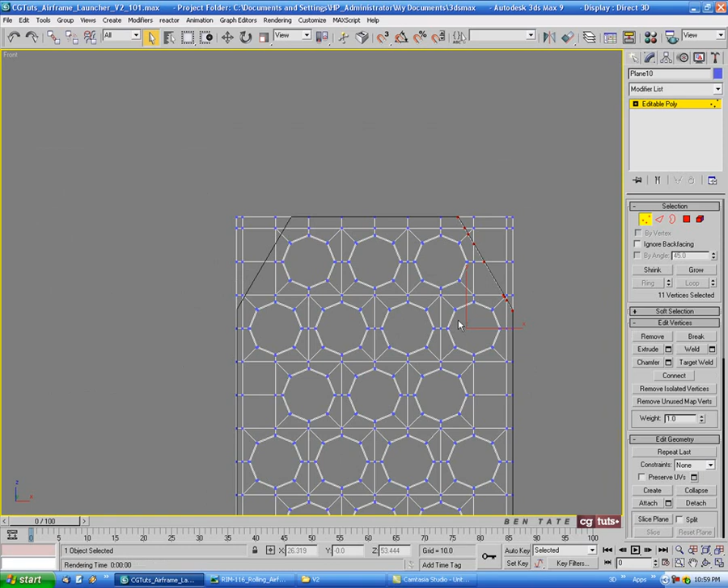Let's go into vertex and select all the verts on this half of the center, everything from the center line over to the left, and delete that. Then we'll come up to the top and select any verts on the outside of our spline line, just grab those, and delete that.

We have a couple triangles here and a couple of n-gons. Let's go to target weld, and weld this vert to this one, and this one up to that one, just so we have a quad here and here.

We have a triangle here, and I don't really want to spend too much time reworking the topology, so let's just get it into quads quick. Let's get out of target weld and go down to cut. I think we'll cut from this edge here, the center of this edge, straight across to the outside edge.

Let's cut maybe from this vert here, and go right up to the top edge, just like that, and right click to end. Then we'll turn cut off and go into edge. Let's select this one here, and control backspace that one over there.

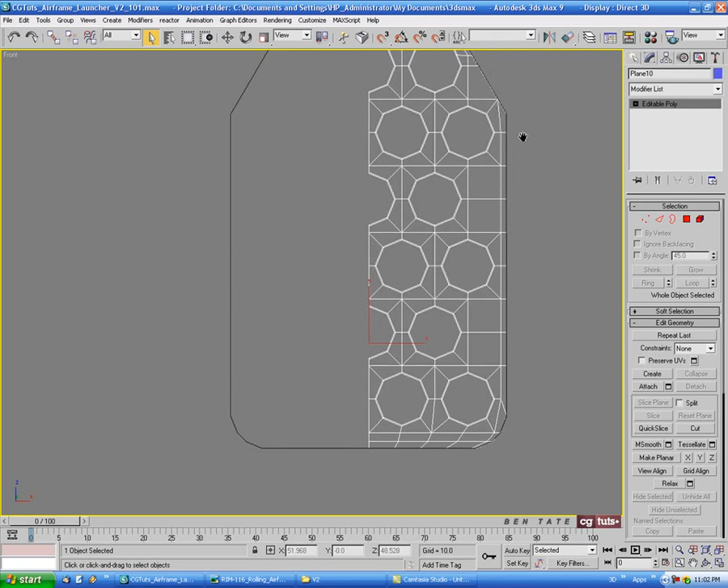Now let's do a mirror, and we'll do a copy on the X, then go over to attach, and attach these two together. Let's also select our spline, hit H and select shape 01. We can delete that now.

Let's go into border and select all the borders, or the circle borders. Actually, wait, I forgot to do a weld there. So let's go into vertex, do Control A, and we just want to weld the center seam. We'll open up weld again, do that the same amount, and OK.

Then we'll go into border and select all the borders for the circles, so everything but the outside edge. Then we'll go to the move tool, hold shift and drag this back on the Y, just to get these some thickness. It doesn't really matter how far you go back, because we'll have some plugs in there anyways, so you won't really see it. Just pull them back a bit, and we'll go into the left view.

Let's just drag right down the center of these edges here. Whoops, actually I'm still on border, let's go to edge, so we have all the edges on the insides of the circle selected.

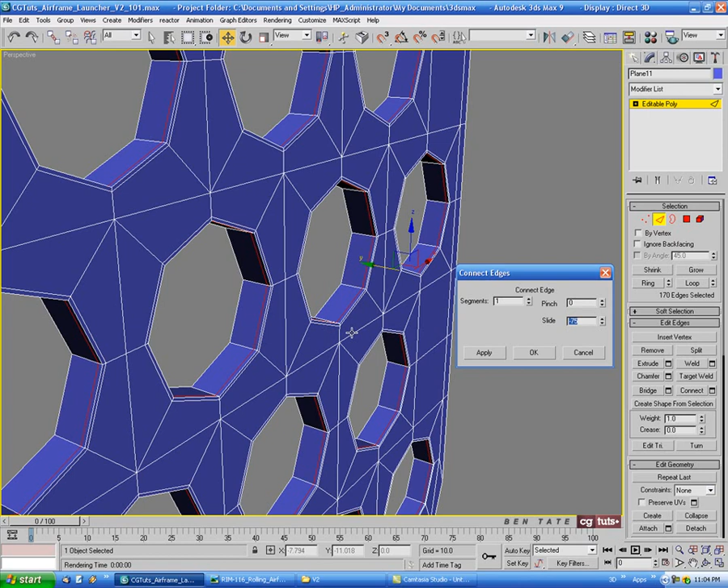Then let's go back into border and select the border around the whole thing. In the left view here, I'm just going to shift drag that back a bit. We don't need this piece to be very thick, you can see it's pretty thin here.

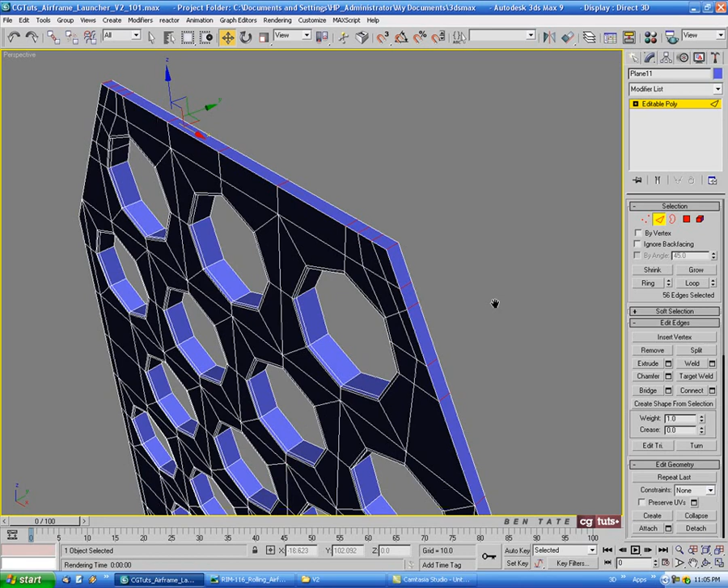Okay, just something like that. Now let's go back into edge, select the corner edge here and do a ring. And then we'll control click polygon.

In the front view, let's do an extrude, and we'll do that local normal, and bring this way down, way down. Okay, let's zoom in here. Let's do that tiny, like 0.3 maybe.

This will just give us a support edge running around the whole face, rather than trying to cut that in by hand. It will make the cap a little bit bigger than the barrel, but that really won't be that noticeable. So we'll just do 0.3 local normal and OK.

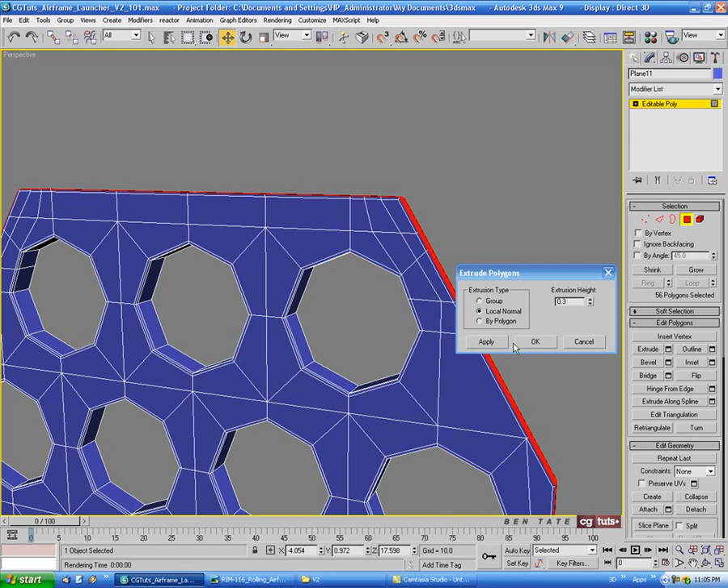And then we'll go back into edge, and those should still be selected for you - the ring around the outside. So we'll just do a connect on that, and let's do 2 segments, no slide, and we'll just pinch those out a bit.

Okay, and we'll do about 80 or so on the pinch for that. And OK. And let's see.

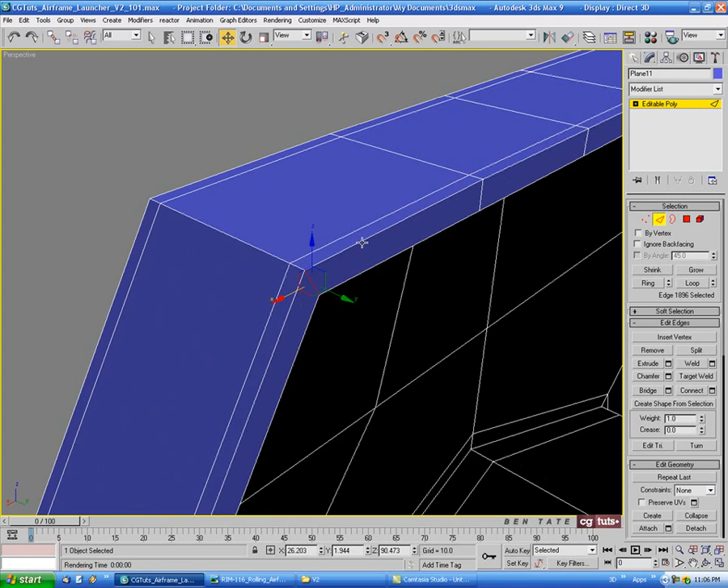Let's select this corner edge on the back, right, just that tiny one there. And just to be on the safe side, I'm going to do a ring and a connect, and I'm just going to do 1 segment with no pinch or slide, so it's right in the middle. Alright, just to sharpen this up a little bit more. And OK.

And let's get out of edge, and we'll put a TurboSmooth on and see if we have any artifacting. Alright, so TurboSmooth 2 iterations and isoline display. Okay.

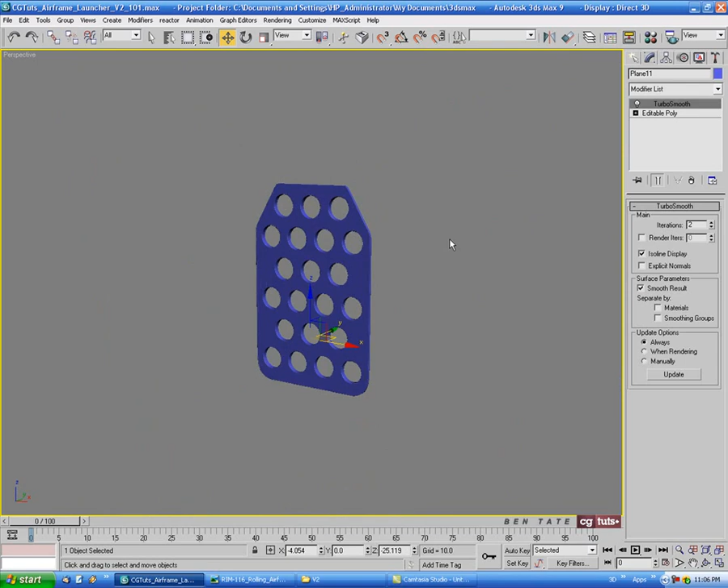And that looks pretty decent. I don't want to take too much time on this piece. So let's unhide all, and we'll also go into the hierarchy tab and center the pivot point.

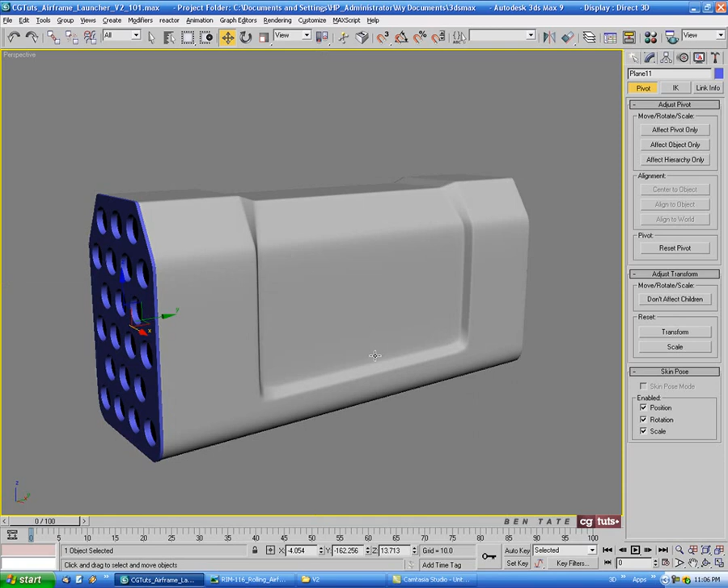And in the left view here, let's just move this to the front, and we'll just line it up. Okay, right there, just so it's sitting up against the front of the barrel. Alright, you can see it's a little bit higher and wider, but that's okay. We'll just leave that.

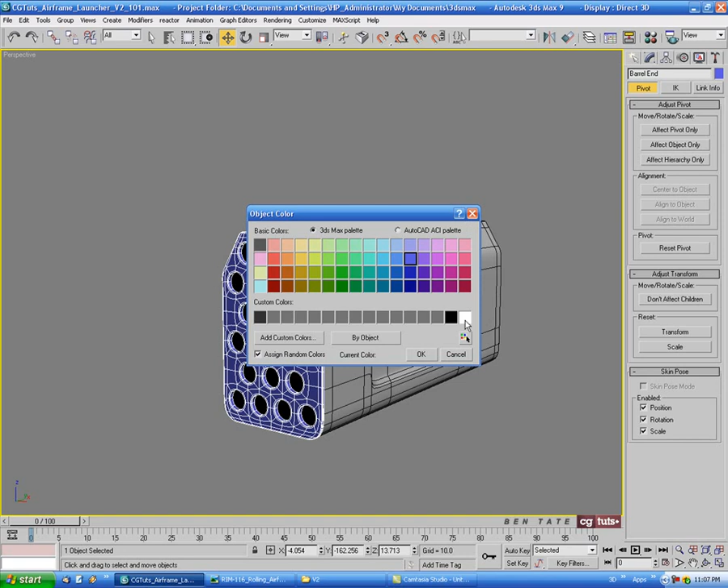Okay, so let's name this, and we'll just call this something like barrel end or something. And we'll change the color and put the gray shader on there. Just like that.

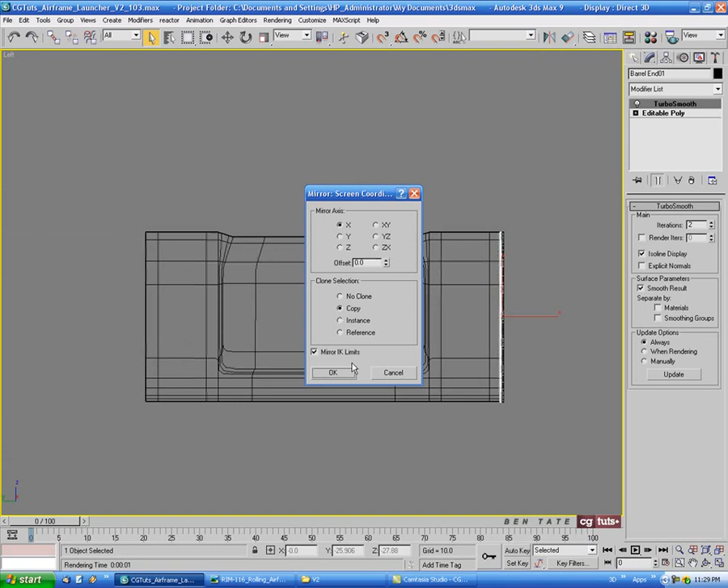Okay, so let's just select the front here, and in the left view, let's just do a mirror. We'll do a copy on the X again, and OK. And let's just move this one down to the other end. Okay, we'll line it up the same way, right, just against the end there.

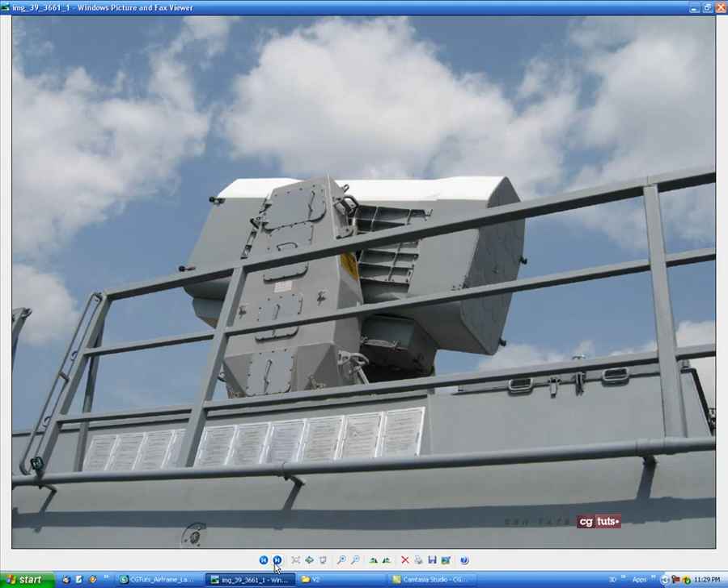And if you're concerned about the poly count, you really don't need to have these holes on this end. If you look at the reference here, you can see that the back of this doesn't really have plugs. It has just some little cylinder doors or caps over top of the holes, so you really can't even see the holes in there.

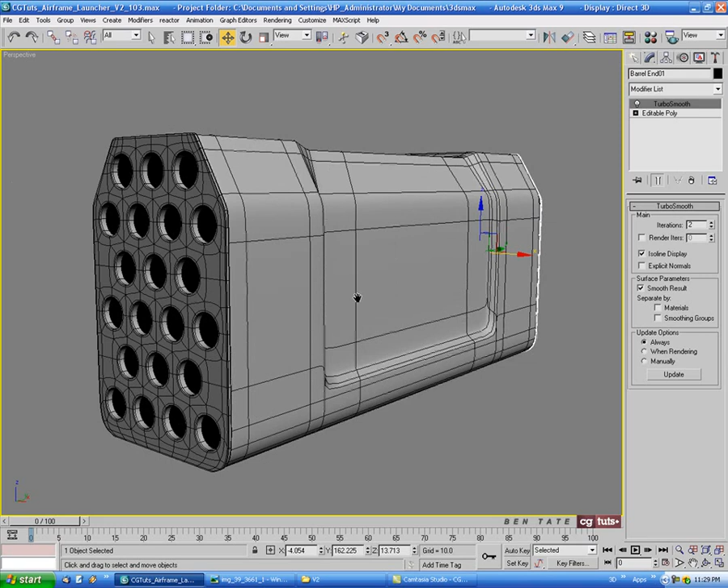So if you're really concerned about the poly count, you could actually just do this back plate flat. But for the sake of the tutorial and speed, I'm just going to do a straight copy of this one. So let's find a front picture here.

The next thing we'll do is the caps in the ends, and these are pretty simple. Doesn't really have a lot of detail, just a small punch in. Okay, so let's go into the front view here, and let's zoom in on the top holes here.

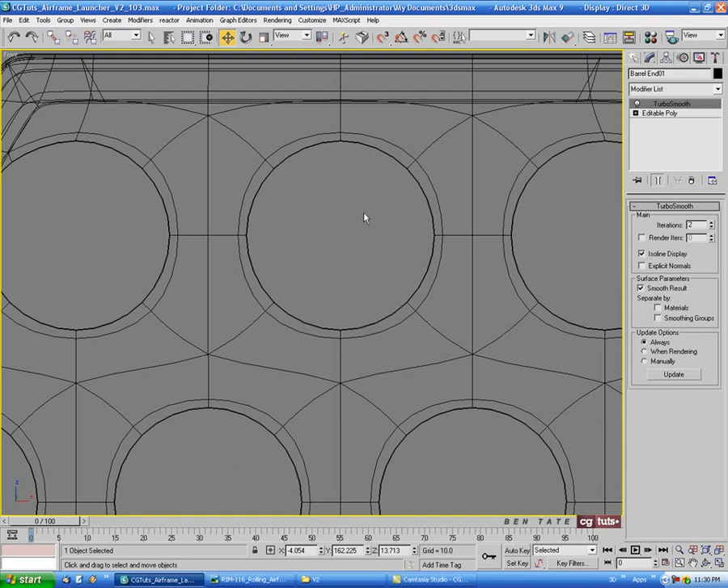Let's just go into the create panel and we'll grab a cylinder. Let's just draw that out, and we'll try to get it close to the size of the hole. Give it a little bit of height, and let's do maybe 8.4 or so for the radius, and try to center it.

Okay, and we're not going to TurboSmooth the caps, that's really unnecessary. So let's just take the sides up, and we'll do maybe about 60, and that's a lot, but it'll give us a smooth result, and this will really depend on how close you're rendering to this. So I'm going to do 60, but you can do less if you want, and we'll also do 2 cap segments.

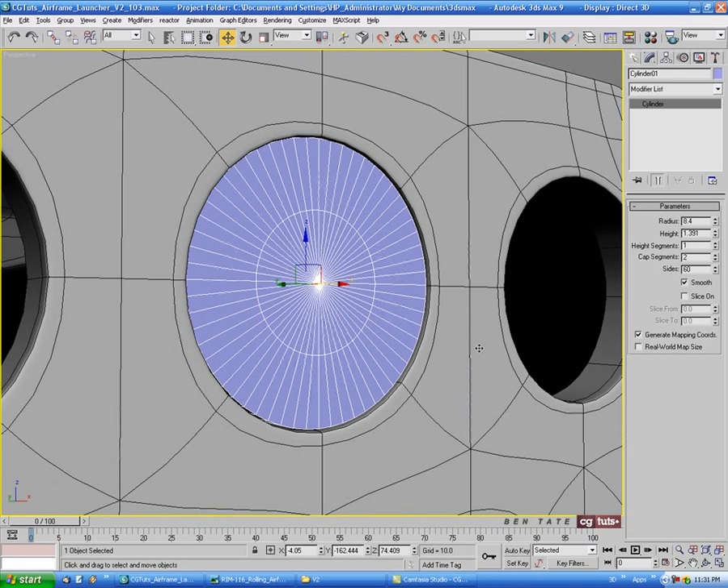Okay, so let's jump into the left view again, and we'll just move this on the X towards the front, and we'll just put it in the hole there. And you can just hit Z on the keyboard anytime and it'll zoom to your selected piece. Okay, so let's see.

Let's right click and we'll convert this to editable poly. Let's go into polygon, and in left view here, let's just select all the polys, and then we'll hold Alt and deselect the front and side ones. Okay, so we just have the back cap selected, and then we'll just hit delete, we don't really need to have those polys in there.

Okay, so let's go into the front view, and we'll go into edge. Let's just select an edge on this ring here, and loop that, and we'll just scale this up, right, let's do something like that maybe.

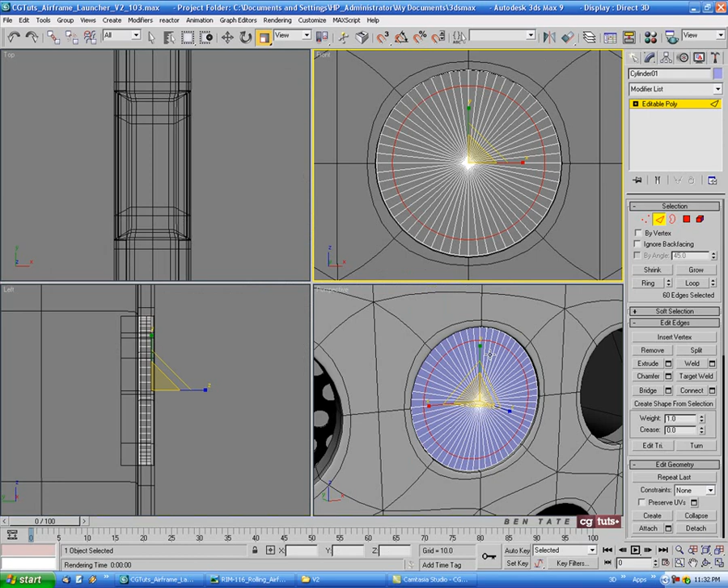Let's go into polygon and select the center polygons, and we'll punch this in with extrude. We'll do a -1, maybe -1.5 on that, and OK.

Let's go back into edge, select the inner edge here, do a loop and chamfer, and take that down. Let's do about 0.15 or so on that one.

Then we'll select the outer two here, loop those and chamfer. We'll take this up a little bit, maybe 0.2, hit apply, and roll it over a little more. Maybe 0.08 on the second one, and OK.

Then we'll get out of edge and put a smooth modifier on this. We'll just do auto smooth, and it'll help with some of the faceting when it renders. Let's call this barrel cap 01, then change the color to black and put the gray shader on there.

You can see it has a little bit of a pin piece here, kind of like a bolt or something on there, so we'll just do a simple one of those.

Let's go into the front view again, go into the create panel, switch this to extended primitives, and grab an oil tank, and drag that out in the center here. Something like that, give it a little bit of height and a little bit of a rollover.

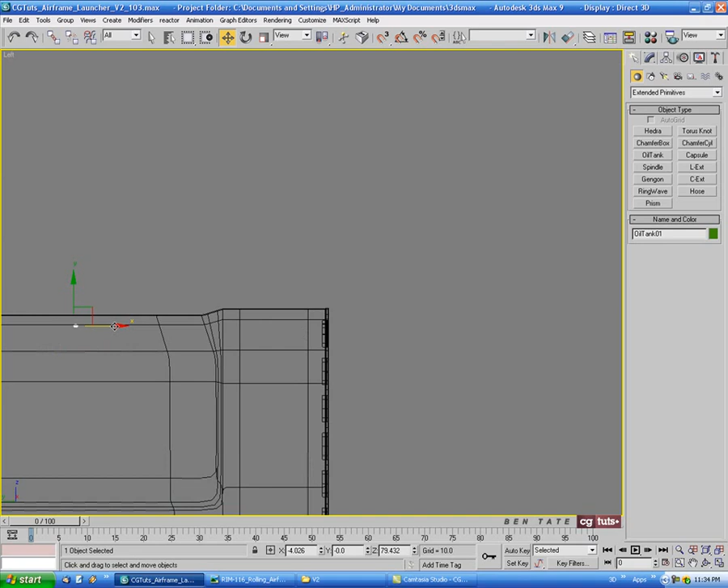We'll move this to the front as well, pull it out here, and let's push it back a bit.

Let's do maybe 0.8 or so for the radius, and leave the height at say 2.5. For the cap height, let's do maybe about 0.35 on that.

Before we convert it, let's add a couple more sides to it. Let's do 20, just so it's a little bit smoother, and then we'll right click and convert this to editable poly.

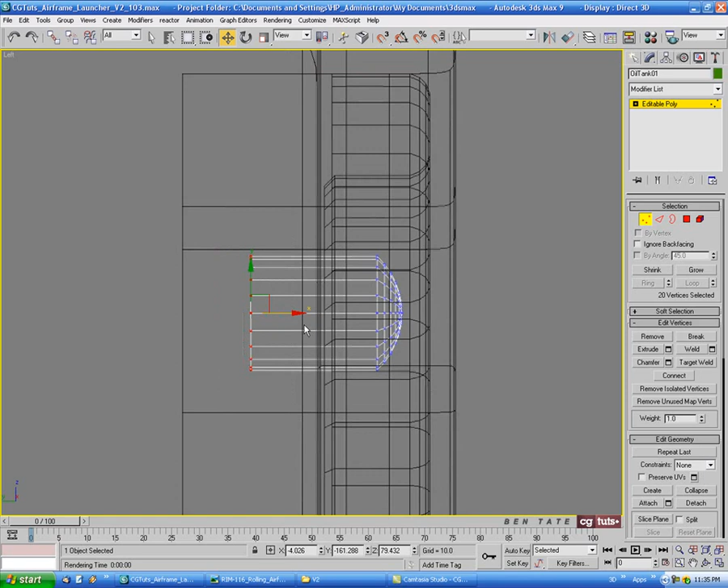We'll go into vertex, grab the verts on the back cap, delete those, then grab this row here and move it forward a bit. Just like that. Let's also chamfer this edge down here.

So let's loop that and chamfer, and let's do a really small one. Let's do about 0.02 and OK.

I'm just going to select the cap here and copy its name, then select our little bolt here and paste that in there, and call it barrel cap bolt 01.

I'm just going to change the color of that. So we'll select that and our cap, and in the front view here, let's make sure everything's aligned. Smooth that down a slight bit.

We'll hold shift and copy it over to the other holes, do a copy there, and try to get that one lined up.

It looks like we have a little bit of a problem here with the mesh, with the hole, but we'll fix that in a minute. Let's just do our copies first.

So let's shift drag this one over here, and we'll line that up, just like that maybe.

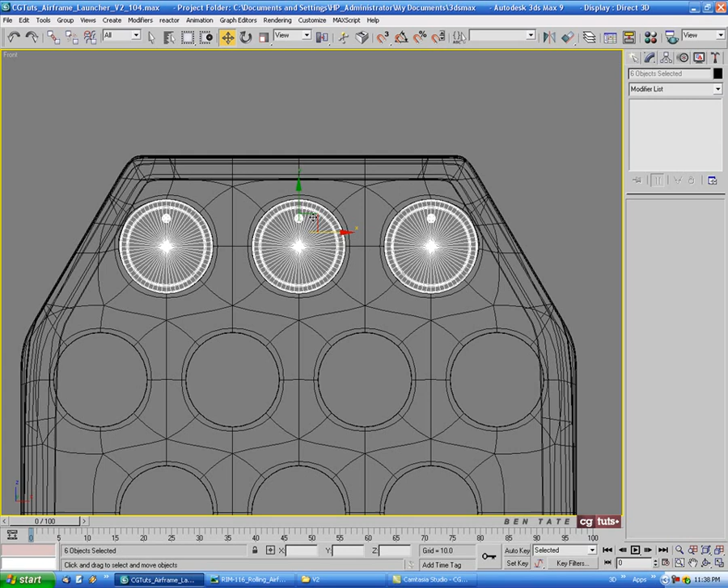We'll hit H, and select all three of our caps and all three of our cap bolts. Then we'll shift drag these down and do a copy, and just move those over and line them up.

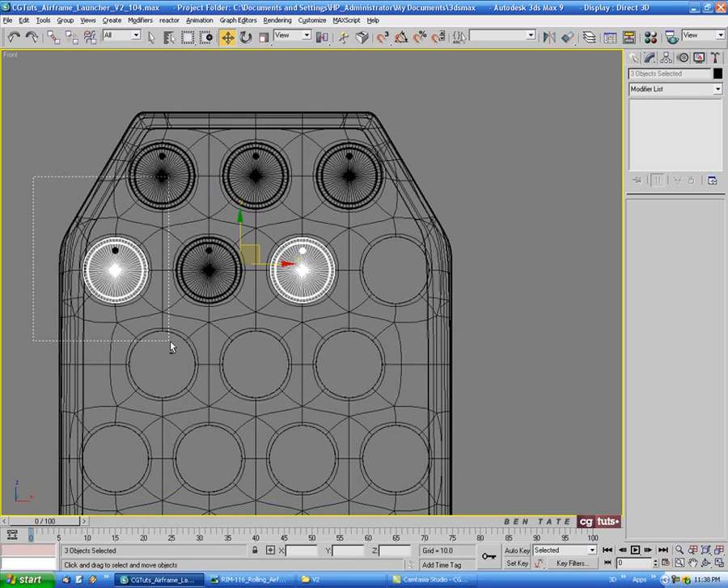We'll hold Alt and deselect these two over here, and clone this one over to this hole and line it up.

Just like that. Then we'll hit H again and select our 7 caps and our 7 cap bolts, and shift drag these down and do 2 copies. That should take care of all the holes.

Just make sure everything's lined up. Let's see what's going on up here. Yeah, you can see we got a bit of a weird edge there.

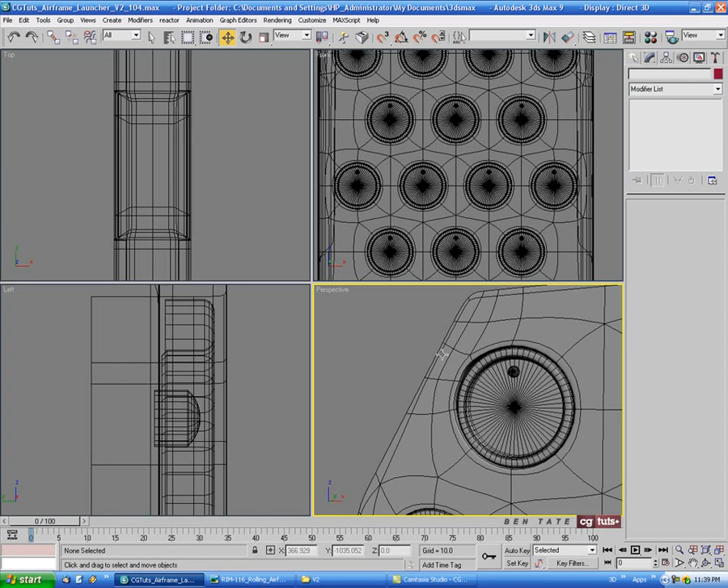So let's select our faceplate, and also select this cap here, then hide unselected. In the front view here, let's zoom in, and I'm going to select the barrel end piece.

We'll drop back down into vertex, and turn on show end result. That's just caused by us cutting this edge in here. These edges are a lot shorter distance between these verts here than the rest of them, and that's what's giving us that artifact.

So we'll turn on show end result, select these verts here, and just try to slightly adjust this a bit to get the circle shape back. Just move these in a bit. Okay.

Okay, so that looks a little better, and I apologize for that. I should have changed the topology a little bit better than doing it this way.

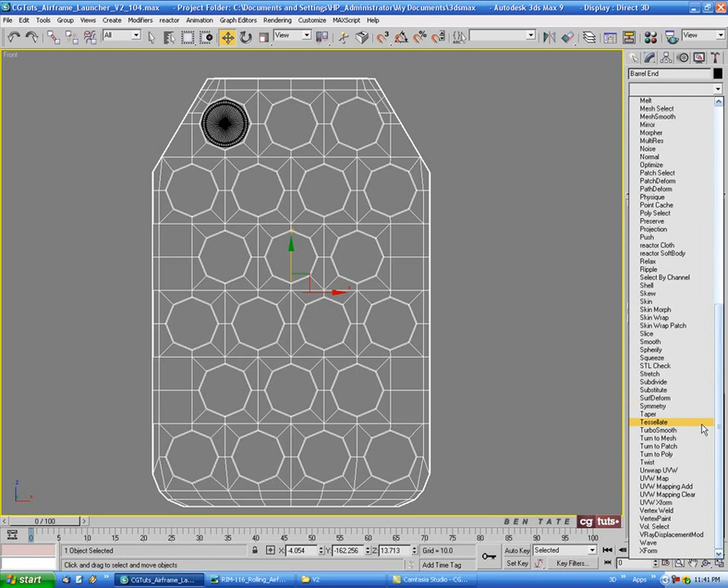Okay, so everything else looks okay. So let's delete the TurboSmooth, and we'll go into vertex. And if your verts don't show up like this, just put a TurboSmooth on, and then drop back down into vertex underneath it, and they should show up. That's just a glitch with Max.

Okay, so we'll just select all the verts on the right side here, the side that we didn't adjust, and we'll just delete those, and we'll do another mirror on this piece so we can fix both sides. Okay, so just mirror that over, copy on the X, and okay.

Let's delete the TurboSmooth on each of these actually. Okay, then we'll just attach them together and go back into vertex, do Control A. Okay, and we'll just weld up that center seam. And I'm just going to do 0.1 on this, 0.01, and okay.

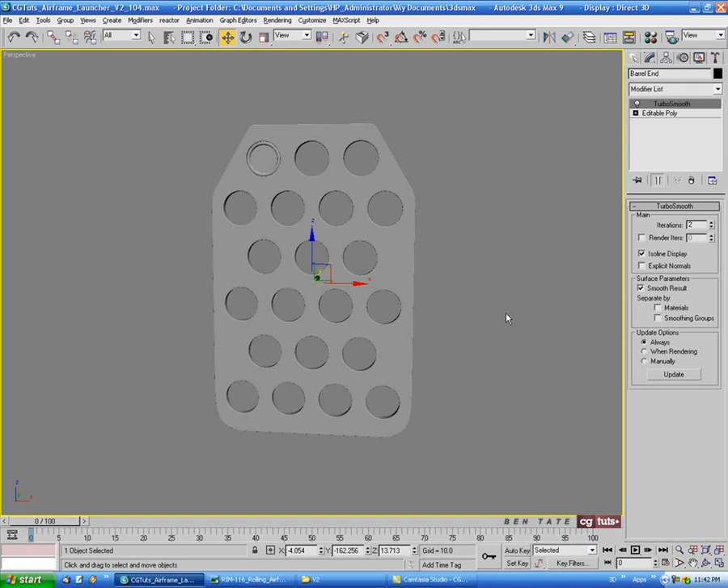Right, and then we'll put our TurboSmooth on, and we'll see if it looks okay. Alright, so let's unhide all, and we'll see if that fixed the problem for us. And it looks like it did.

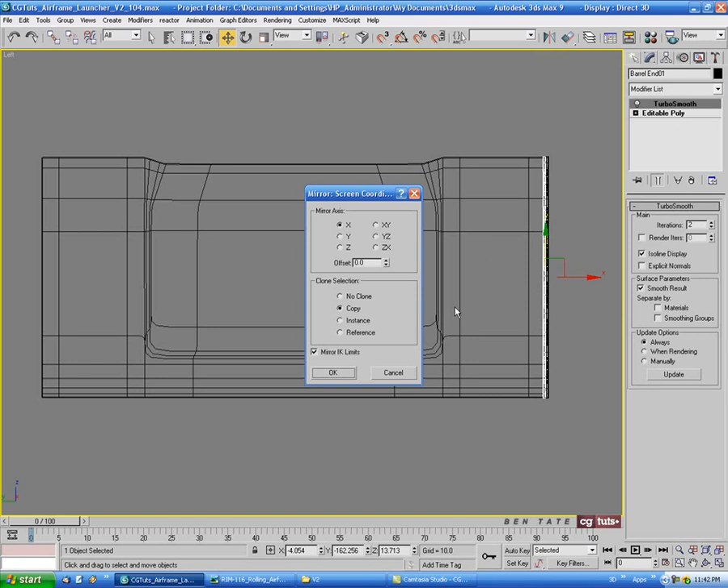Alright, so once again, sorry for that mistake. Let's select the cap at the back, and we'll just delete that, and then we'll just reclone the good one again. Okay, so in the left view, we'll just mirror this over, copy on the X, and we'll just move that to the back and line it back up.

Alright, just like that. Right, so I think that's good. And let's go around the back again here.

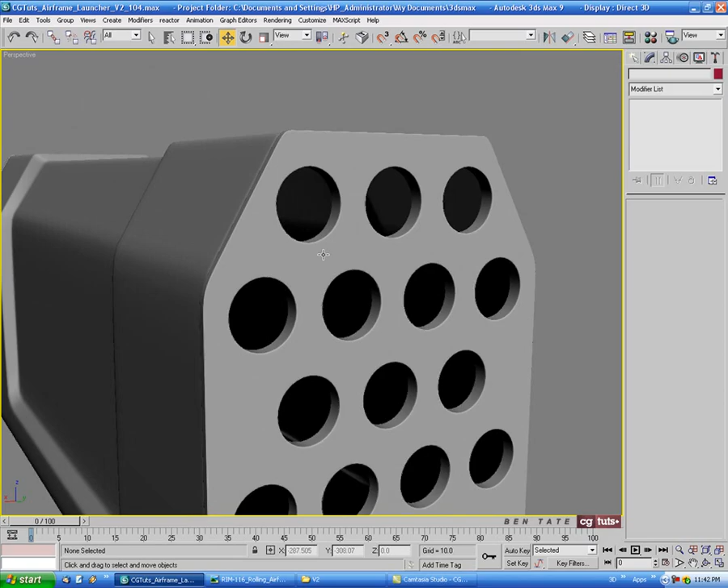And for this, we're just going to do a really simple one. Okay, just pretty much a cylinder. Right, so we'll select the back piece here, and we'll hide unselected. Whoops. Okay.

And in the front view here, let's just zoom in. Okay, and we'll grab another cylinder. Right, just match that up with the hole, and we'll go a little bit bigger on this one. Okay, and let's just line that up. And you can just line up the vertical edges here and the horizontal ones with the ones on the mesh. Okay, just to make sure that it's actually centered to the hole. Just like that. And I think I'll just leave it at 60 sides for this one as well.

Okay, so we'll right click and unhide all. And we'll just move this to this end. Okay. And let's just push that against the surface. Alright, just so it's sitting against it. Alright, just like that.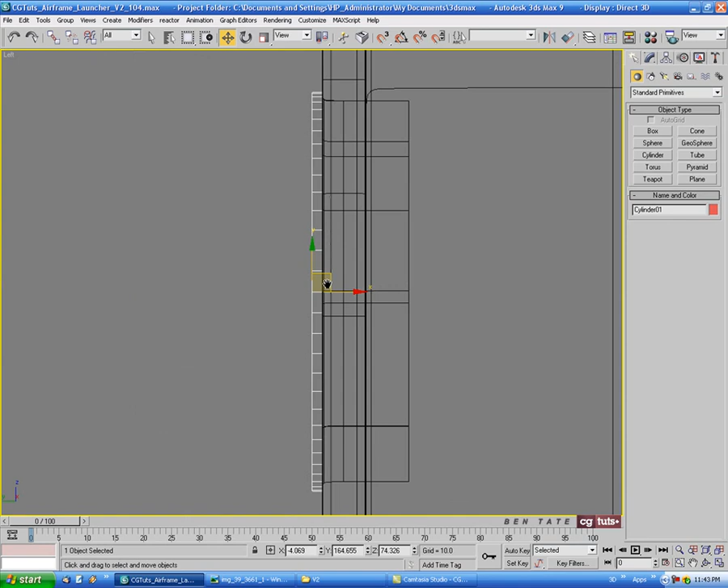Right, so let's do 8.8 on the radius, and we'll do 0.5 or so on the thickness. Alright. Let's actually do 0.6 maybe. Okay, and we don't need the extra cap segment, so we'll just take that off. Alright, then we'll right click and convert it to editable poly.

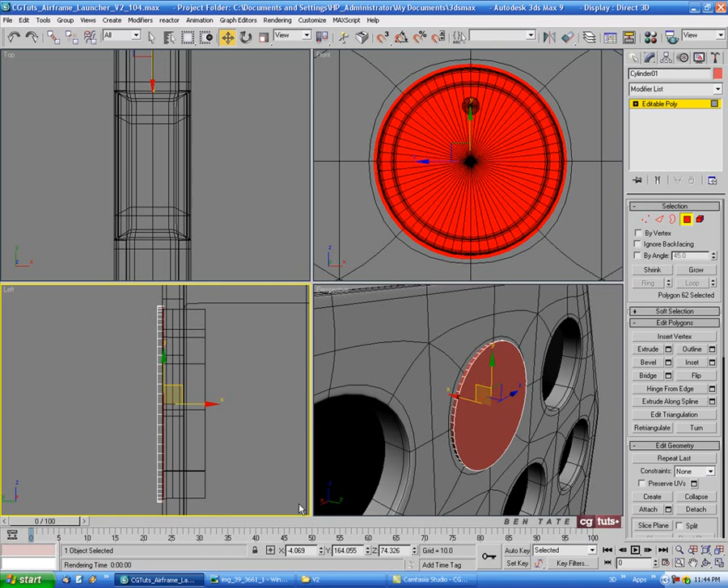And we'll go into polygon and we'll just select all the polys again. And then we'll deselect the front and sides, holding Alt. So we have the back cap. Right, we can just delete that.

And then we'll select the front polygon and we'll control click edge. Right, just so we have that front edge selected. Let me just change the color here. Alright, just that one. So we'll chamfer that down. And we'll just do that, say, maybe 0.12 and OK. And then we'll get out of edge.

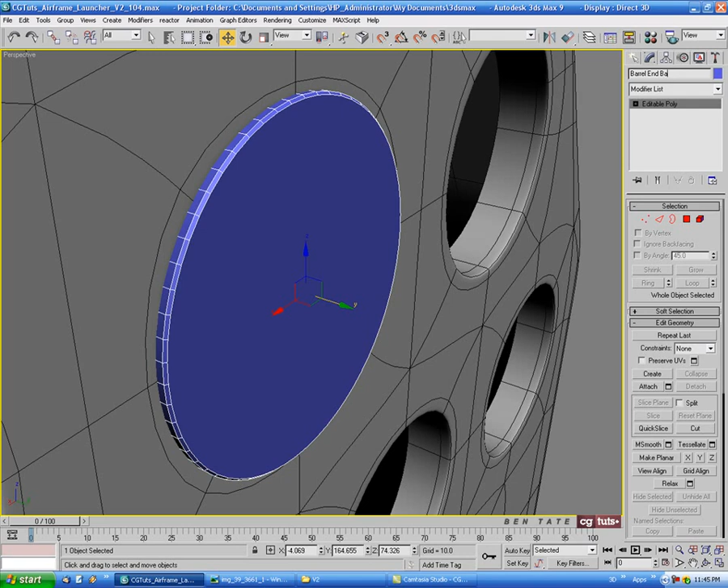And let's just name this piece as well, and we'll call it barrel end back cap 01. Okay, and then we'll just change the color.

Okay, so we'll just clone this around to the rest of the holes here. And let me actually just select the back plate here and the cap, and then we'll hide unselected. Okay, just so it's easier for us to see.

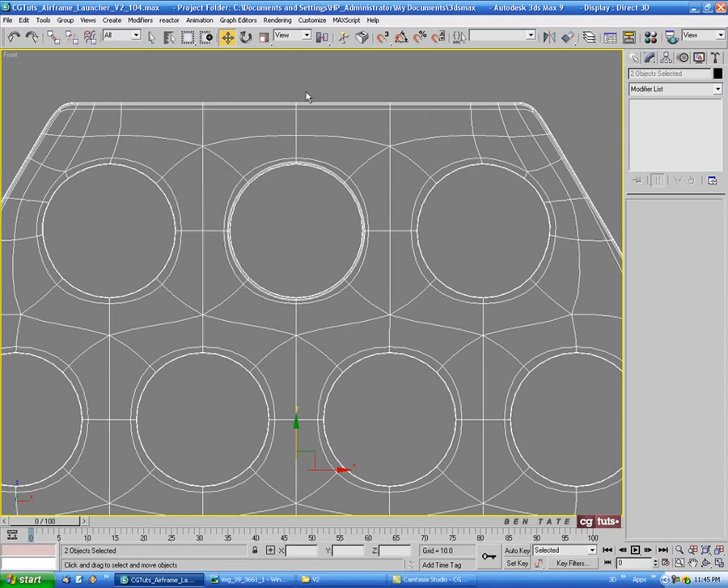Okay, so let's just select the cap here, and we'll just clone this around quickly. Okay, so shift drag over there, line it up, and then shift drag this way, and line that one up.

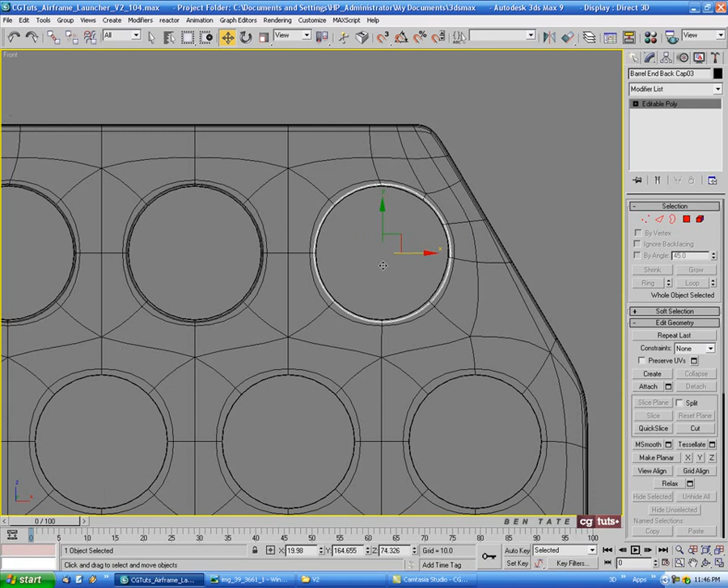Okay, and then we'll hit H, and we'll select the 3 caps, and we'll shift drag down on the Y. Okay, and we'll choose copy, and we'll just move these over. Okay, just line up the middle one there. Then we'll hold Alt and deselect these ones, and we'll do one more copy of this one.

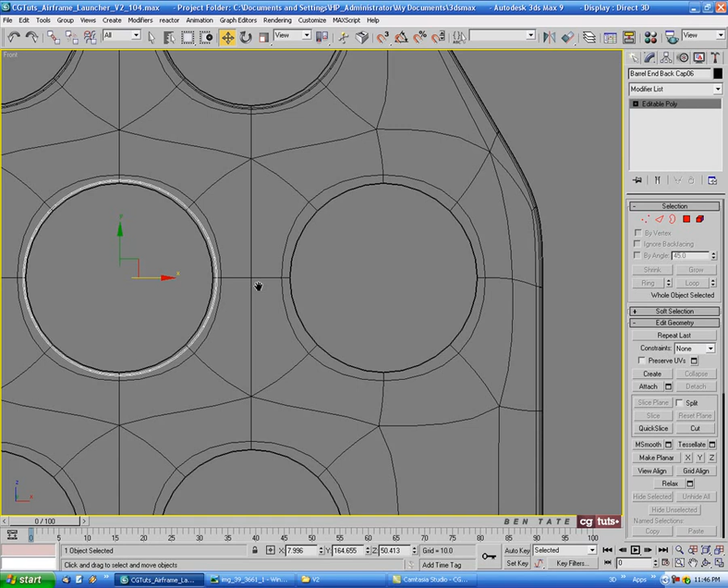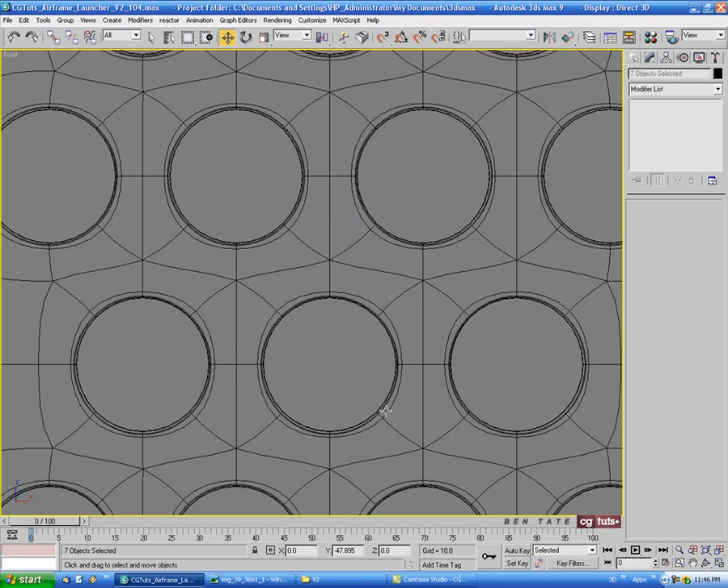Okay, just like that. Then we'll hit H again and select the 7 caps, and we'll shift drag on the Y one more time and just line those ones up, and then we'll do 2 copies and OK. Okay, and that'll give us all of our plates. Alright, just like that.

So let's right click and unhide all. Alright, and I think that's everything we need to do right now.

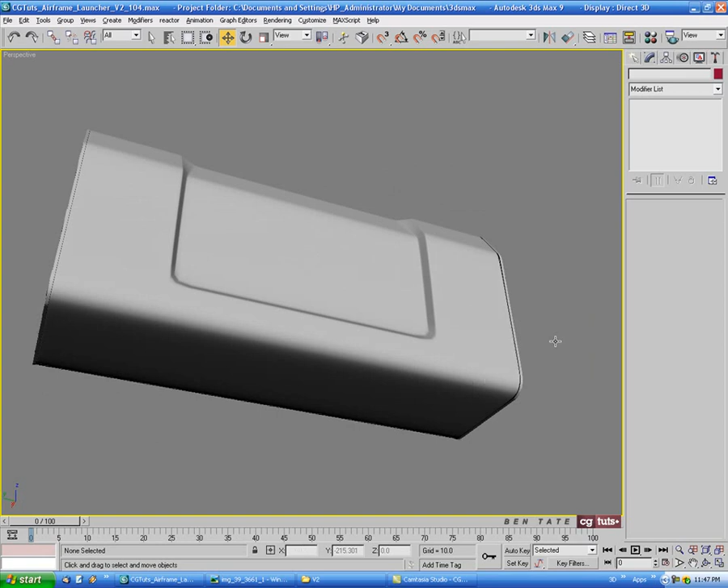Okay, so the next thing we'll do is start working on the grill on the side. Let's go into the left view here.

I think we can probably make this all out of one piece. Let's zoom in on the side here in the left view, go to the create panel, and grab a plane. We'll drag this out just slightly down from this edge here.

Okay, so just like that maybe, and we'll come down a little bit short from the bottom. Maybe something like that. Let's do 80 on the length and 190 on the width.

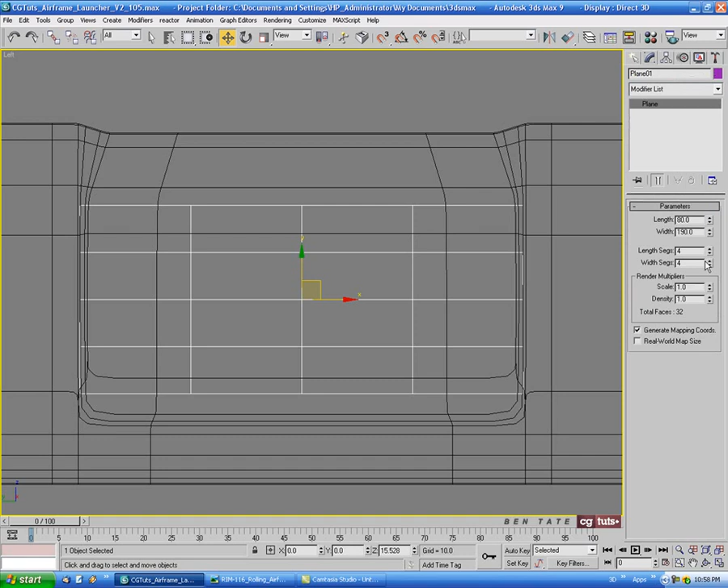We'll right click the move tool and zero out the X and Y spinners. We'll also get rid of these segments for a minute. So just like that, and let's pull it over in the top view.

Let me just change the color of this. We'll pull it back so it's almost touching the surface. In left view again, let's right click and convert this to editable poly.

Let's go into edge and select these 2 edges, and we'll do a connect on that with 1 segment. No pinch, no slide. And OK.

And then we'll go into vertex and grab the 2 right verts on this side, and let's just delete those, and we'll just work on half of this at a time.

Okay, so let's go back into Edge, and select these two edges here. You can see most of these are probably pretty much the same width, but this one here is a little bit longer, so let's just add a couple of edges in here.

So we'll do this one first. Let's do a connect again, and we'll just pull this over, maybe about there. Then we'll select these two edges again and do another connect with one segment, and we'll leave that one where it is.

Alright, so this one's going to be a little longer than this one. Then we'll select these two edges here and do another connect, and we'll just leave that one right in the center. Okay, so just like that.

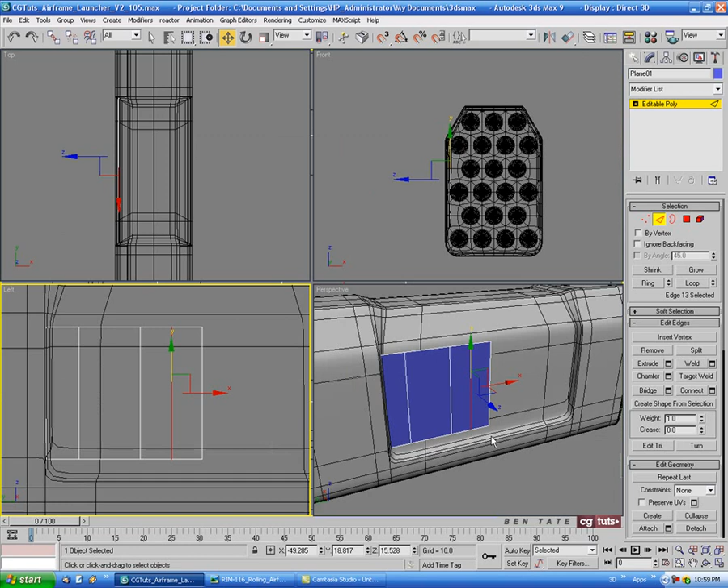Right, and then we'll select the edges this way and do another connect, and let's just do 4 segments. No pinch, no slide. OK. Right.

And then we'll select all of the edges here. Actually, let's select these ones in the center, and we'll leave the 2 end loops unselected. So everything but this edge running down this side and the one running down the middle. Then we'll just chamfer these.

Okay, let's see. Let's take this down a little bit. Let's maybe do 0.75. Hit OK.

Alright, and on the reference here you can see that we have this kind of cut corner here, so let's cut that in. Let me just right click and hide unselected just to make this easier to see.

Okay, we'll zoom in here on the corner, and let's get out of Edge. We'll go down to cut, and let's just cut from here. We'll go over a little bit, then do an angle cut here, and then straight up. Okay, just like that.

And we'll just connect these 2 verts here, this one and this one down here. So just like that.

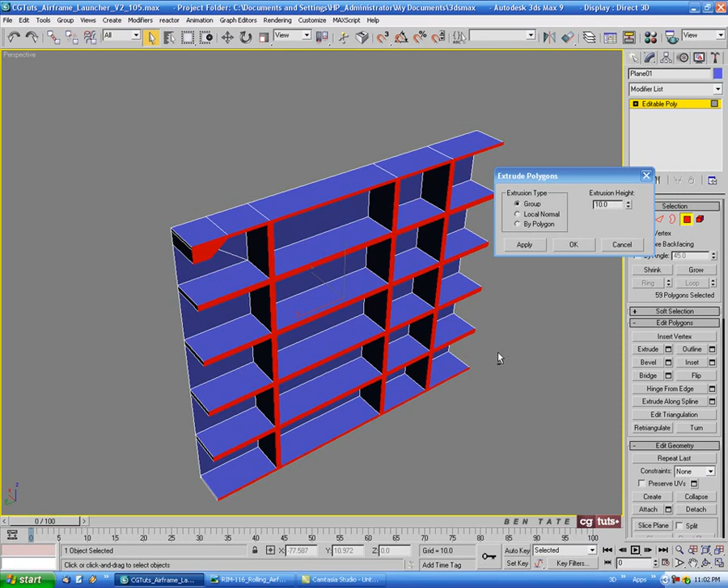Alright, let's right click and unhide all. We'll see how far we need to bring this out. Let's back it off a bit, maybe about 4 or so. And OK.

And then we'll go back into the left view and select the big polygons here. Okay, just all those, and we'll delete them. Alright, so we just have the outline left, like that.

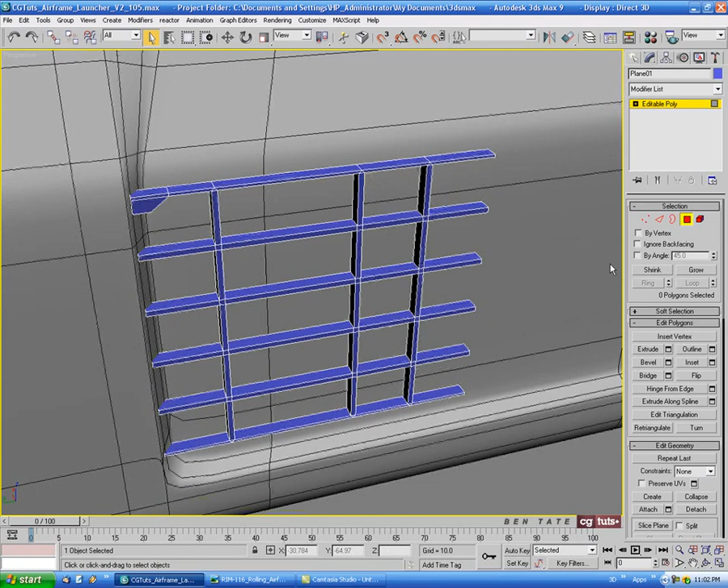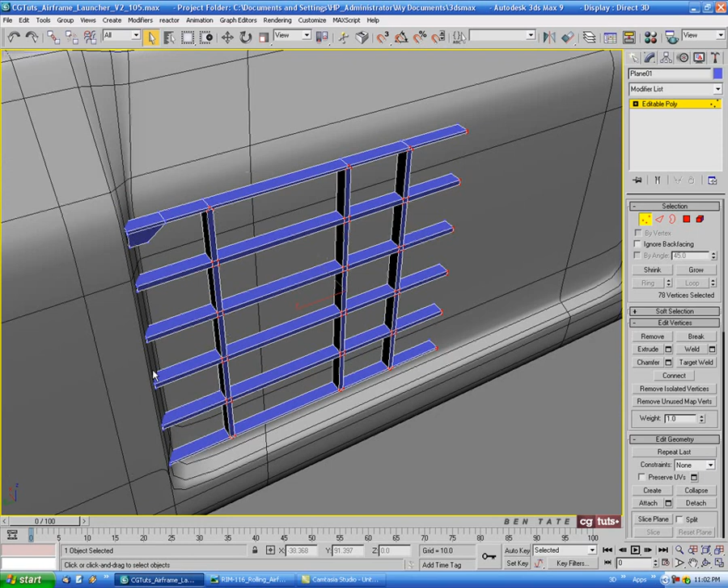And then we'll go into vertex and go into the top view. Alright, we'll zoom in, and let's grab all these front edges here, all the verts, okay? So all the verts up to this point here, and we'll leave this end unselected, okay? So just like that, just the fronts, okay?

In the top view, we'll go to the move tool, and we'll just pull these out slightly, just to give this a bit of a taper. We'll bring that out a little bit, then deselect these ones here, and bring these out a little bit more to get an angle on the front. We'll deselect these ones, and bring these 2 center ones out a little bit more, and that'll give us a bit of a taper.

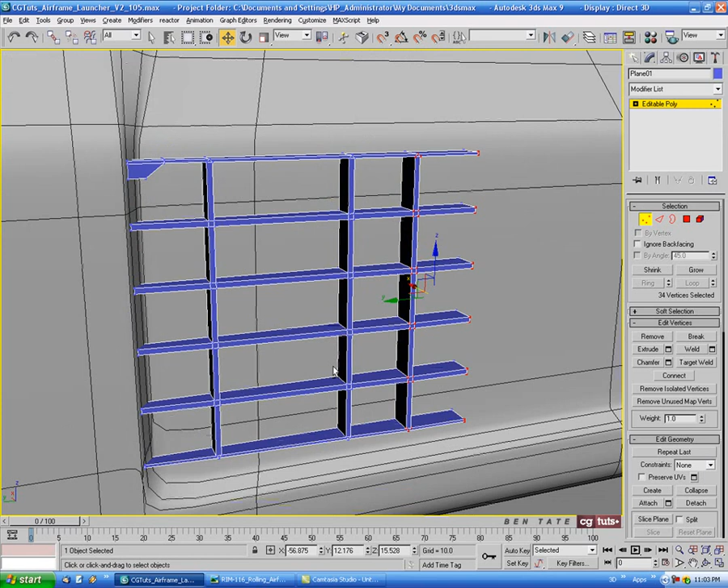Okay, and I think that should be pretty good. Let's just grab these ones here, and I'm just going to move them back just slightly. Okay, just like that, maybe a little bit more.

Right, and then we'll come over on the side here, and we'll go back into Poly. We'll turn on ignore back facing, we'll just select the end caps here. Okay, just those 6, and we'll delete those.

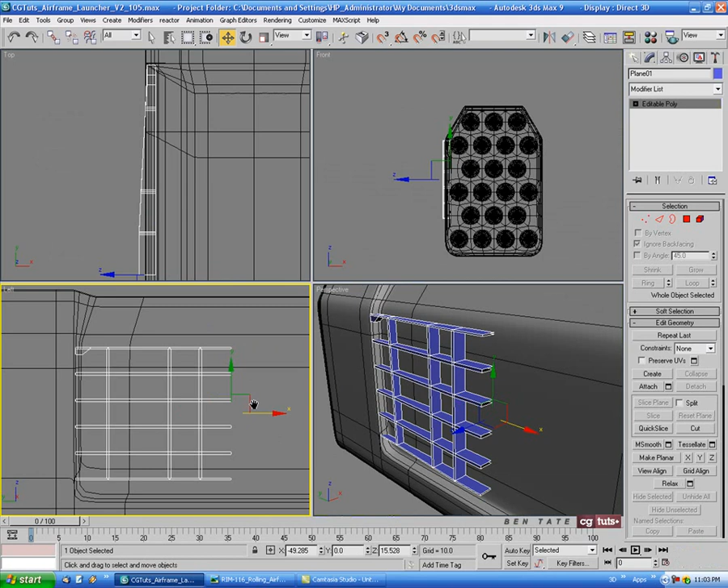Right, and in left view, let's do a mirror. We'll do a copy on the X. And OK, and then we'll go to attach and we'll attach both sides together. Turn attach off, and then we'll go to vertex and we'll select the center verts here, and we'll do a weld, and we'll just do 0.1 and OK.

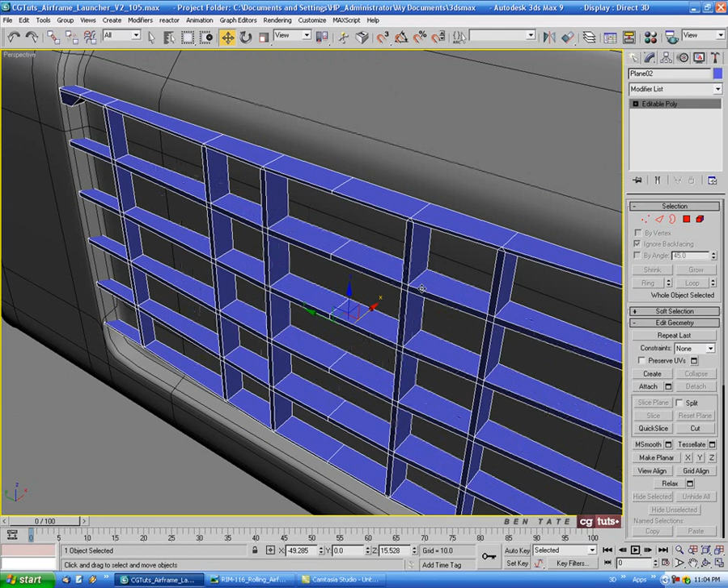Alright, just like that. And I think that should be good. So we'll just push it back a little bit more until it intersects the surface.

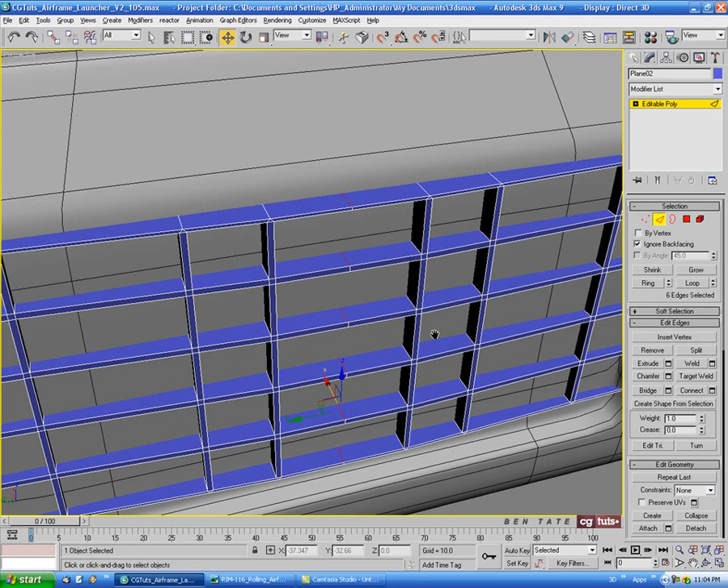Right, and let's see, let's go into edge and we'll just select these edges in the center here. Okay, we'll select an edge on each of these extrudes, and then we'll do a loop and then control backspace just to take those out. We don't really need them.

Alright, and let's go into the front view here and we'll zoom in. And with edge selected, let's just grab all of the edges besides the back ones. Okay, so just everything besides the back faces.

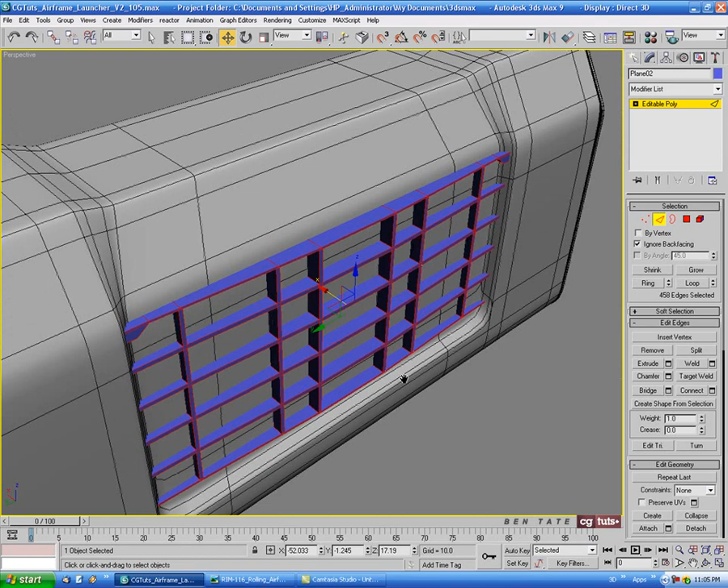Alright, we'll just chamfer these down. Okay, we'll do that pretty tight. Let's bring this down. Let's do maybe 0.2 on that. And OK. And we'll see how that looks.

Okay, I think that's probably good enough. It's not going to be exactly the same, but it's close. Alright, and we also have this edge running down here, this strip here, so we'll just put another box in there just to create that. Right, so

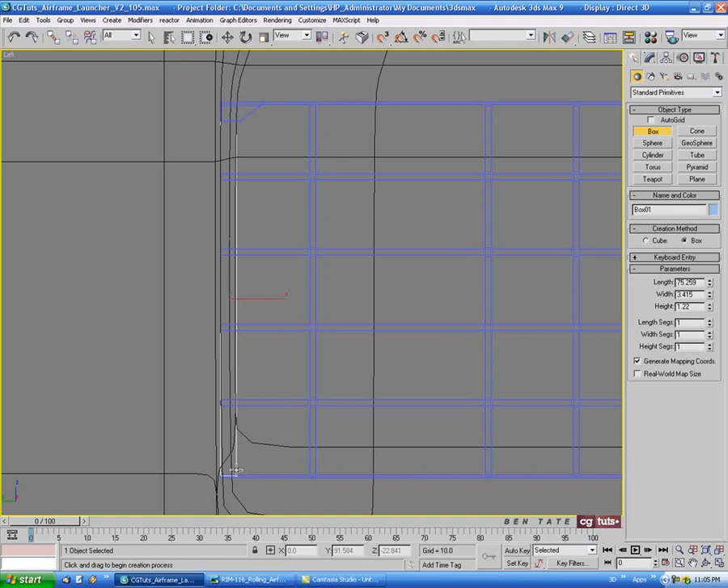Let's go into the create panel, grab a box, and we'll just drag one out on the side here, just from the top to the bottom. Okay, give it a little bit of height, and in the top view we'll just move this over.

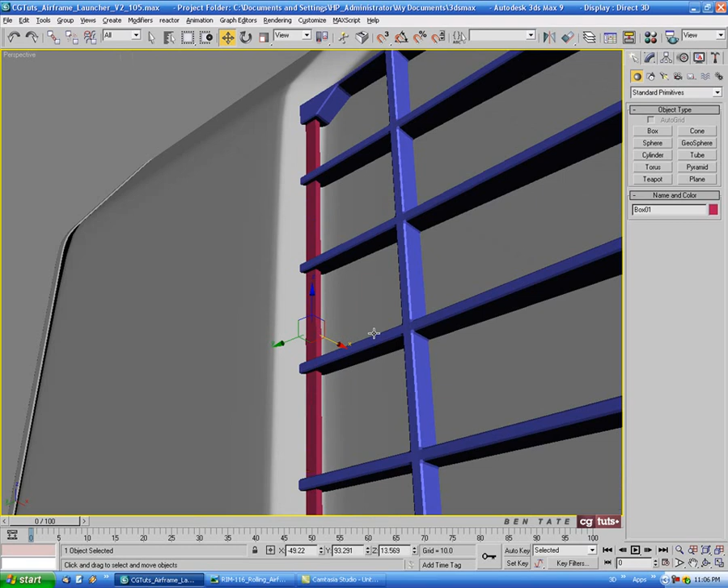Okay, and let me just change the color here so you can see it. Okay, let's push this back a bit. Okay, so we'll take it back a bit from the edge. We could probably go back a little bit more than that.

Alright, and then we'll right click and we'll convert this to editable poly. And then in the top view here, let's go to vertex. We'll just grab the back verts and just pull them in. Okay, just so we don't have any gap in there.

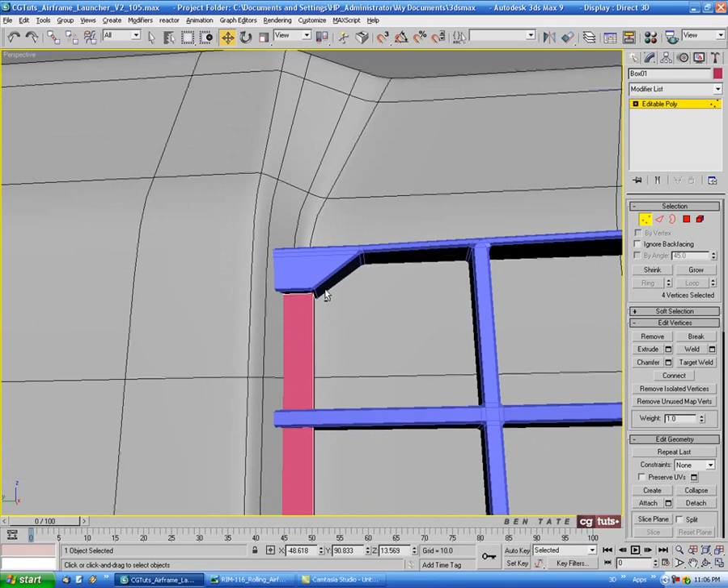And we can probably make this a little bit thicker. So on the left view, let's select the right side verts and we'll just move that over a bit. See how that looks. Okay, we'll go just to about the edge of this top piece here, right? Just like that.

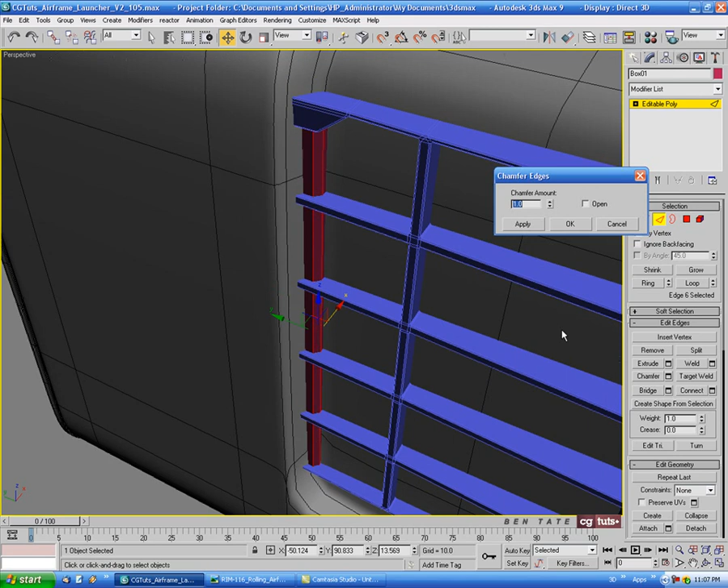Okay, so let's go back into edge. And let's see, let's select the front two edges. Actually, we can probably just select this one right front edge here. Okay, just this edge here, and we'll just chamfer that down the same amount, which is 0.2. And okay. Alright, I think that's probably good.

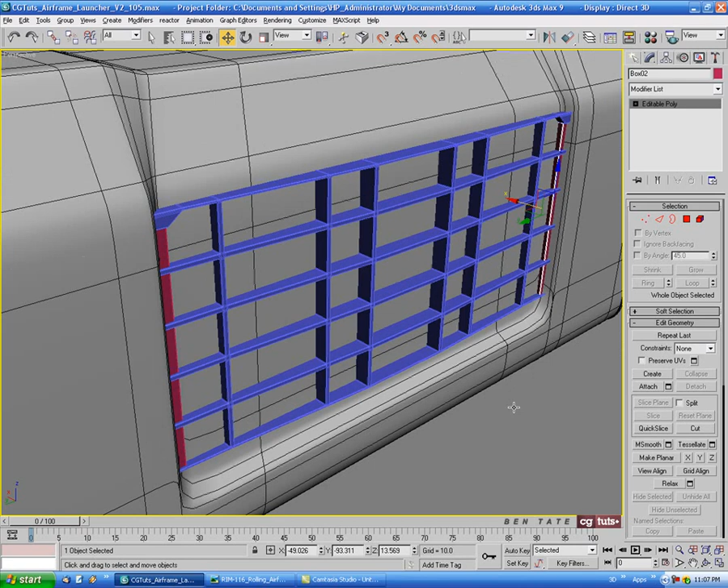So let's get out of edge, and we'll do a mirror on this piece, another copy on the X, and we'll just pull this down to the other side and line it up the same way. Okay, so we'll just line up this edge with the corner here. Alright, just like that. Okay.

So I think that should be fine for the grill part. Okay, so we'll just select all this stuff here, and we'll change the color to black and put the gray shader on there. Okay.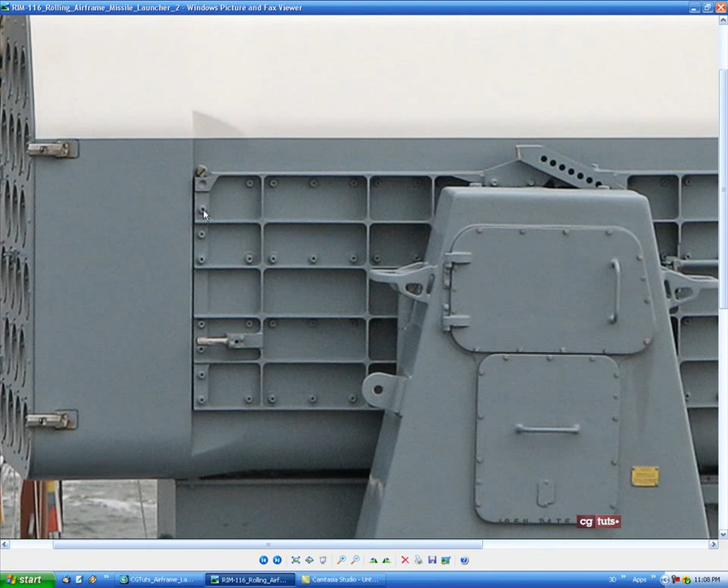And these are really simple bolts. They're pretty much more like a rivet or something. It just is round with a hole in it. Okay, so we can do that simply. Okay, so let's go into the front view, or left view, sorry, and we'll zoom in here on the top left corner of our grill.